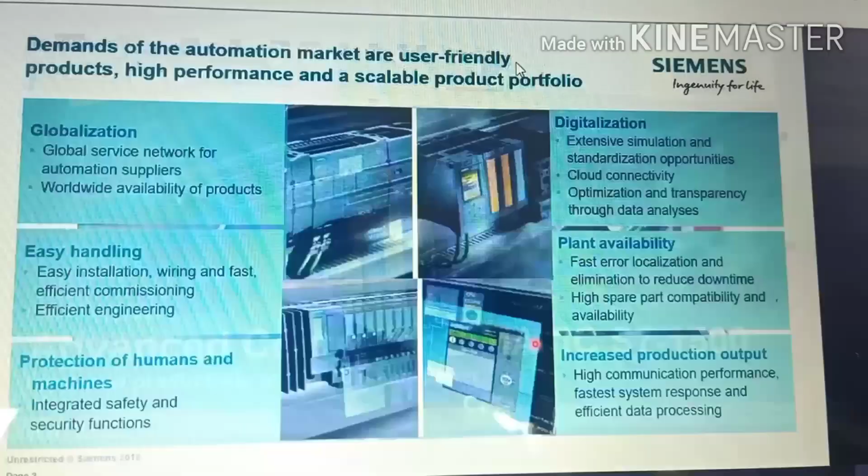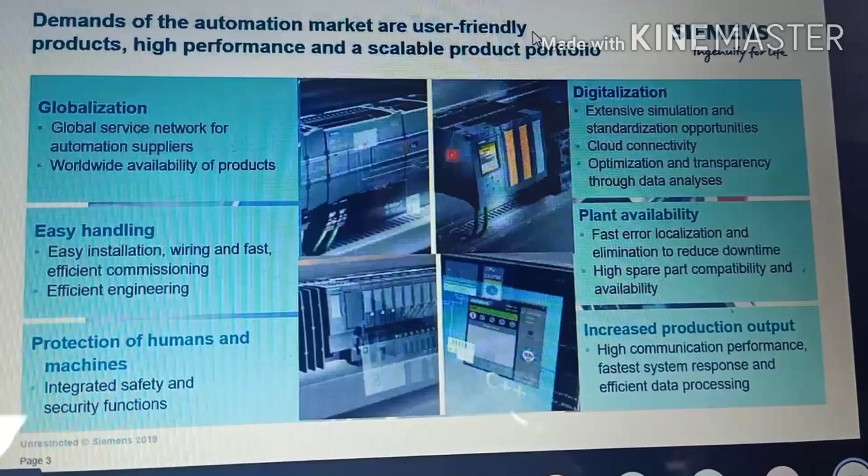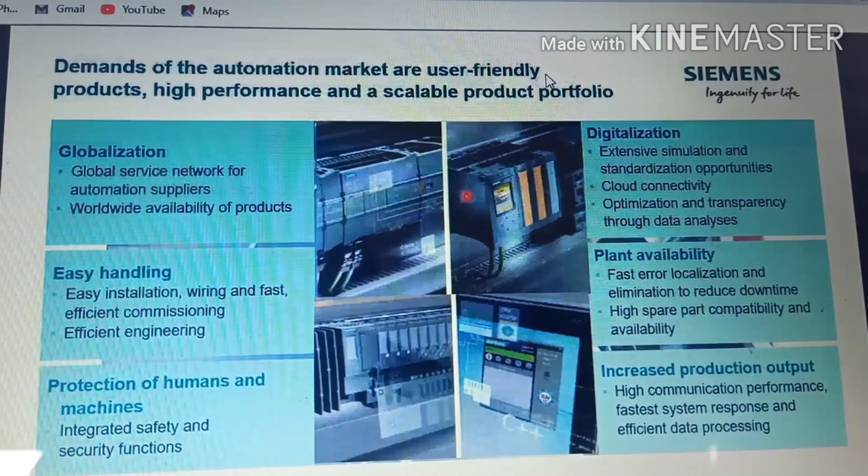As of today, the technology is ever changing. Every day, new requirements are coming for the OEMs. New challenges are there for end users to support their infrastructure and their solution providing and product offerings to the consumers. So why S7-1500?

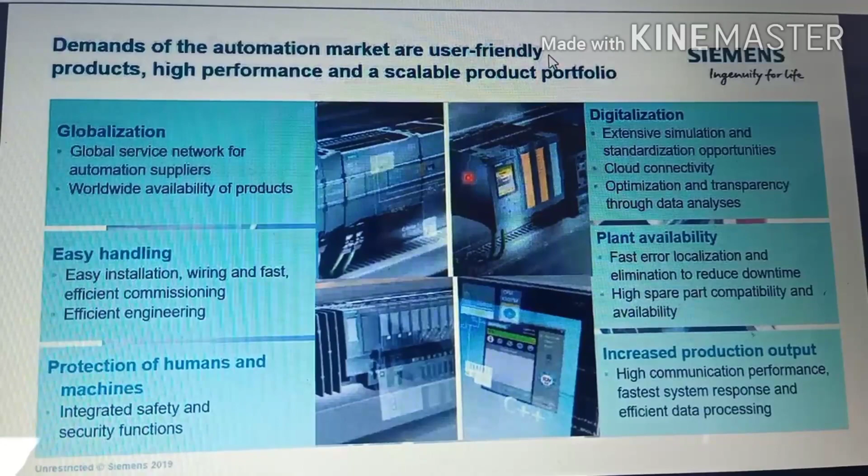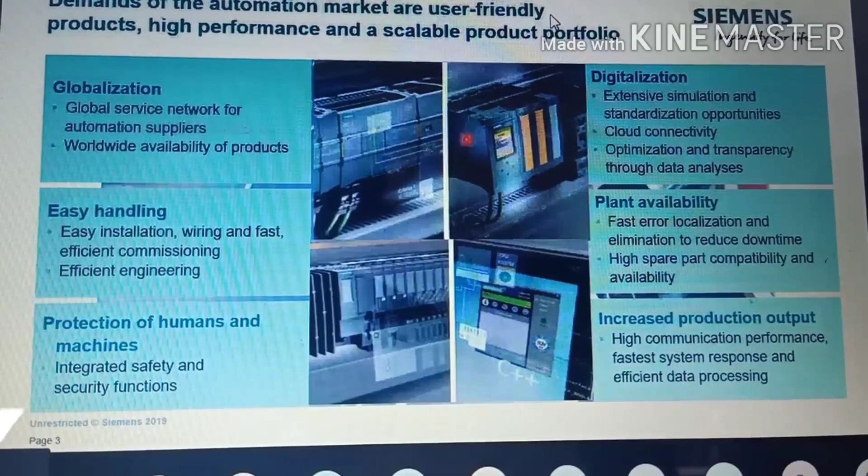Today the S7-1500 comes with a myriad range of facilities and the promise that it would help you increase production output. As of today, the S7-1500 can be used as your classic PLC plus a gateway to the digital world. Our Siemens S7-1500 comes with technology integrated as well as fail-safe solutions too.

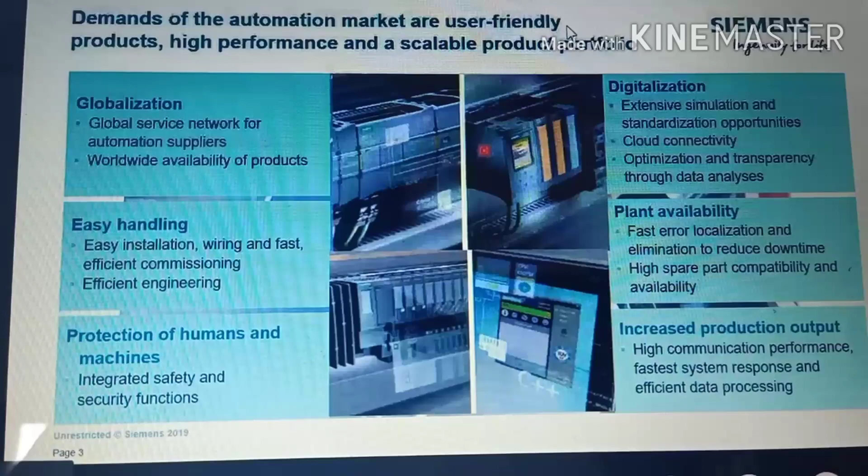Just to give you a brief, our S7 1500 solution, 1517 we call it, we have different ranges of the solution. A higher level of S7 1500 PLC can handle almost a whole automotive plant.

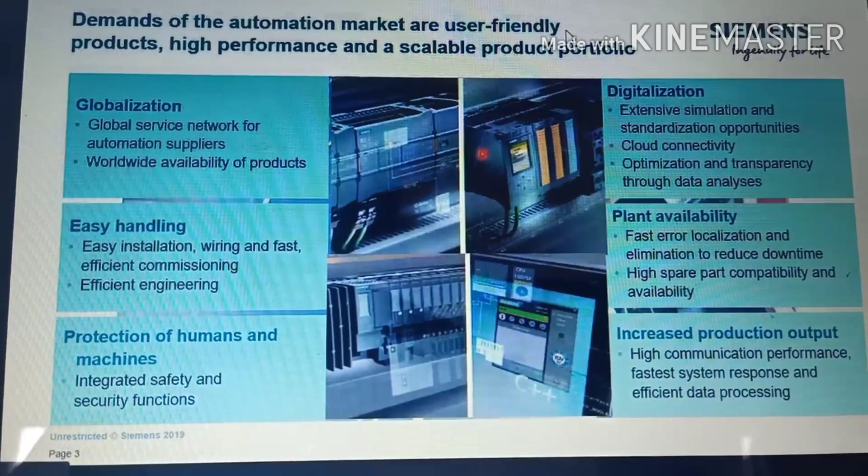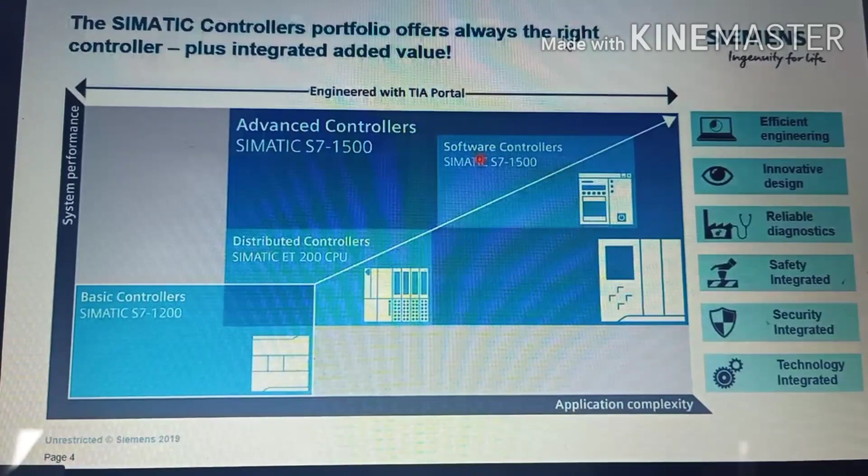To get into the details about it, next I will be showing you the product placement of S7 1500 across our PLC solutions of Siemens.

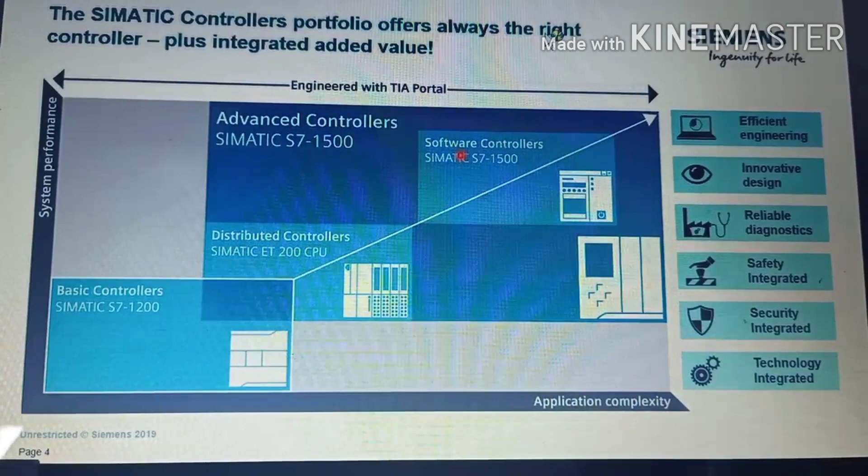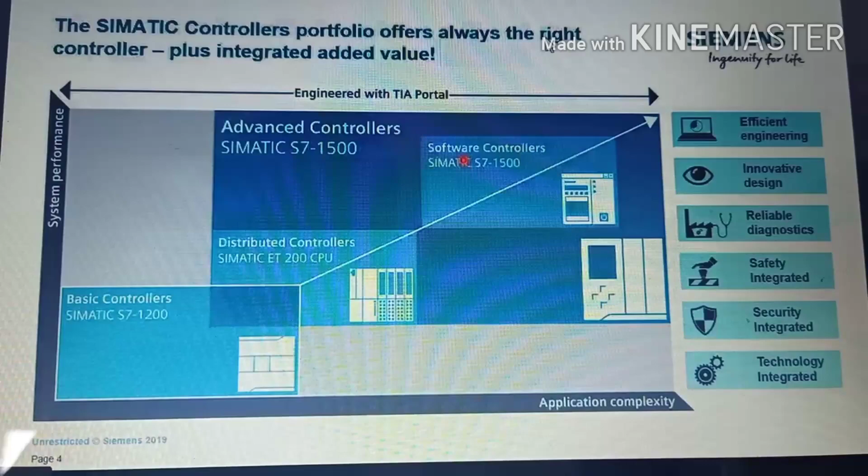On the y-axis you can see the system performance, on the x-axis you can see the application complexity. We have a range of S7 200 and 1200, which are basic SIMATIC controllers in which you can have nearly up to 250 IOs, having a basic solution in which you can program it and see it in your HMI and carry the non-important or very non-critical task.

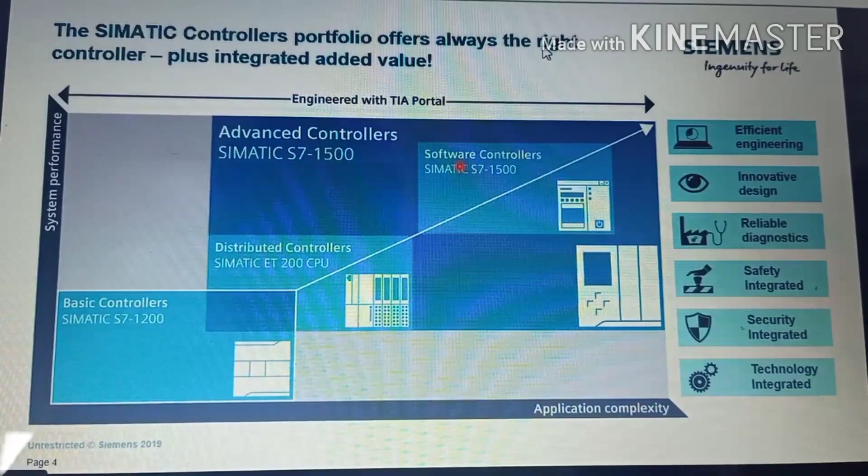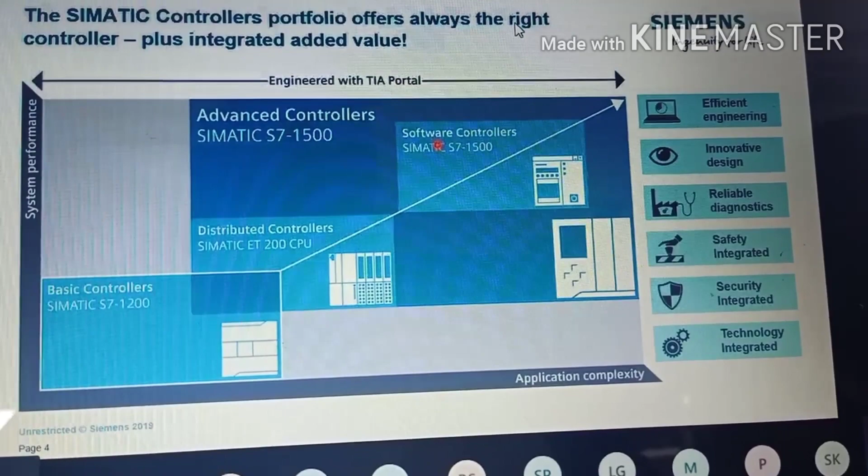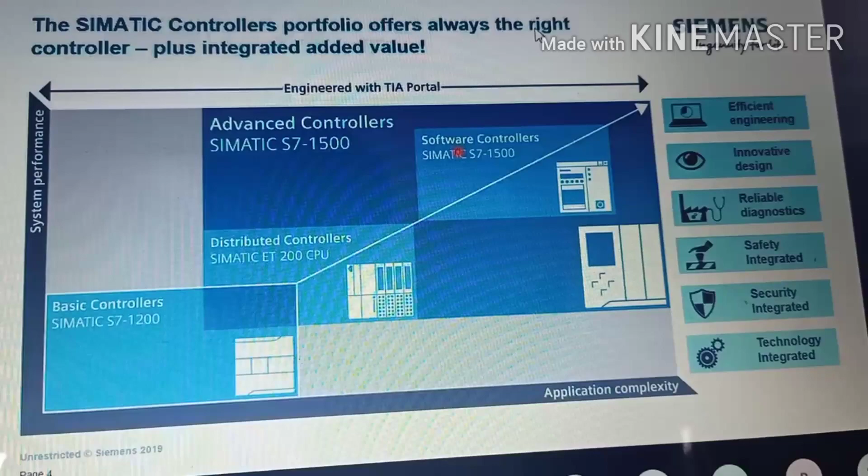After that, we have a distributed controller named ET200 SP or ET200 S solutions. There are 1000 IOs. ET200 controllers can help you get the field IOs directly back to the central system by having a Profinet or Profibus connection, in which your hardwired solution can not be very efficient. Like 300 or 200 meters of wiring would be a very difficult task compared to the Profinet connection of 200 meters with the distributed controllers. Then we have the software controllers of S7-1500.

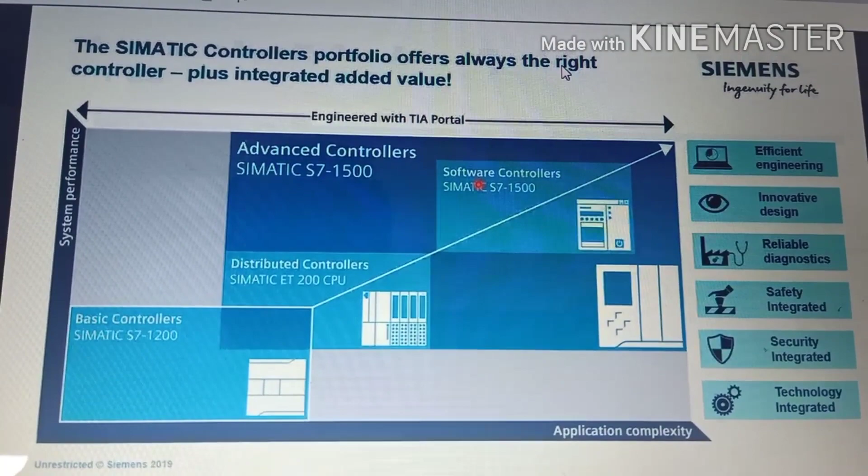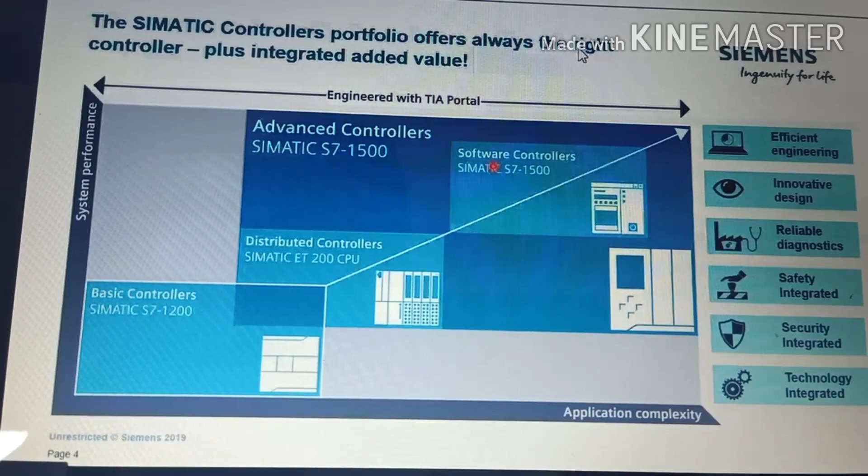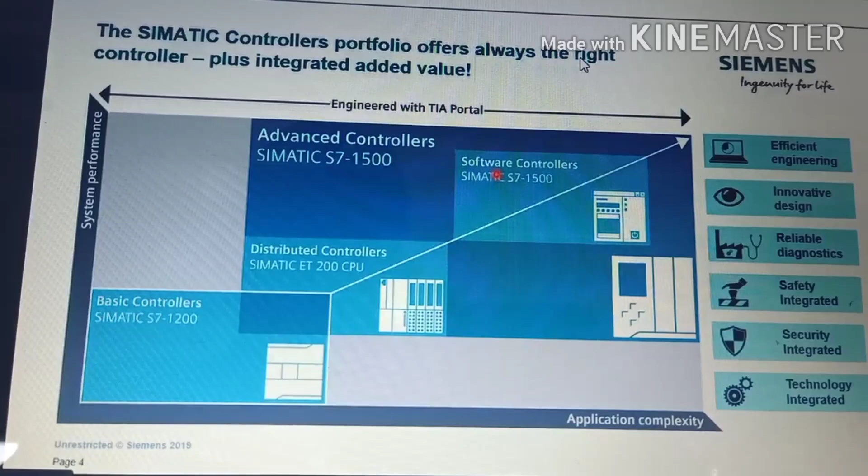The very speciality of S7-1500 is it comes with different features of reliable diagnostics, integrated security, and integrated technology. It comes with OPC UA, the Open Platform Communications Unified Architecture, in which you can connect the system of your plant with vertical as well as horizontal integration.

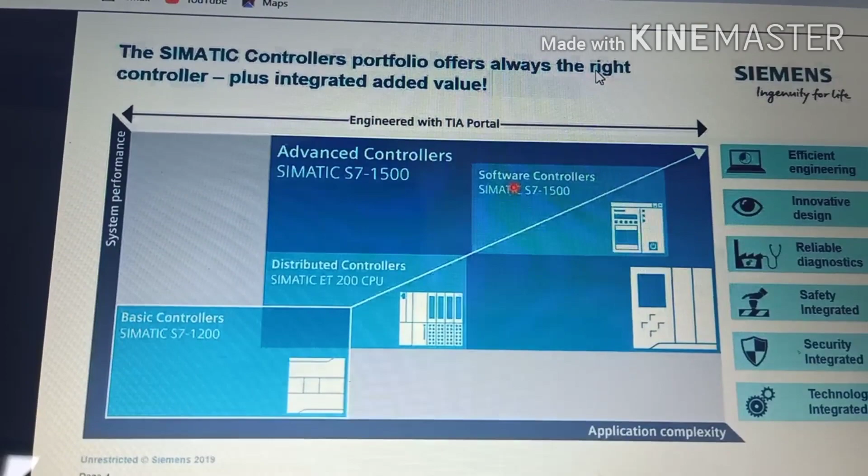And to sum everything up, the solution which you can see here can be engineered with our Totally Integrated Automation Portal, known as TIA Portal.

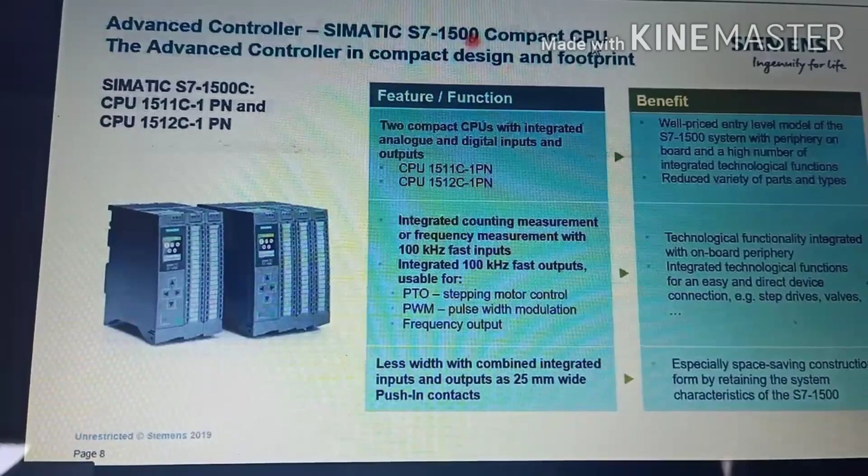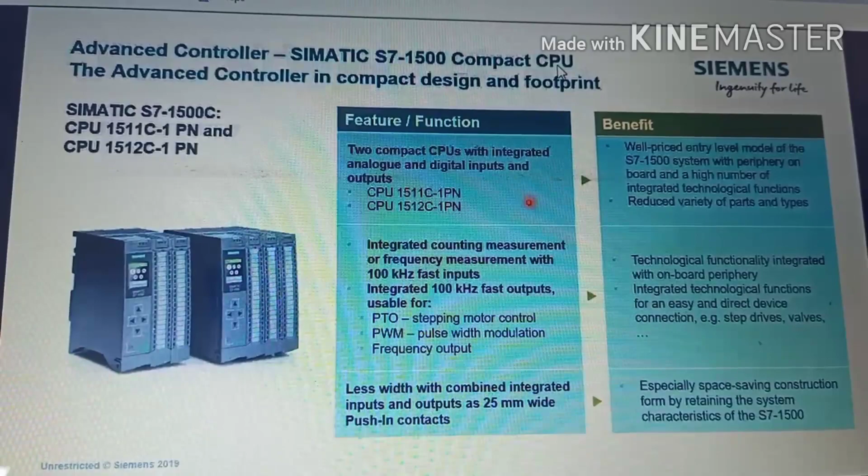Some of the features and functions of S7-1500: we have a solution of 2 compact CPUs in which you do not need additional IO cards if you have only 50 or 60 IO systems. Like in 1511C, which has one Profinet port, and 1512C with one Profinet port, you can have nearly 32 to 64 DIDOs or AIOs clubbed in.

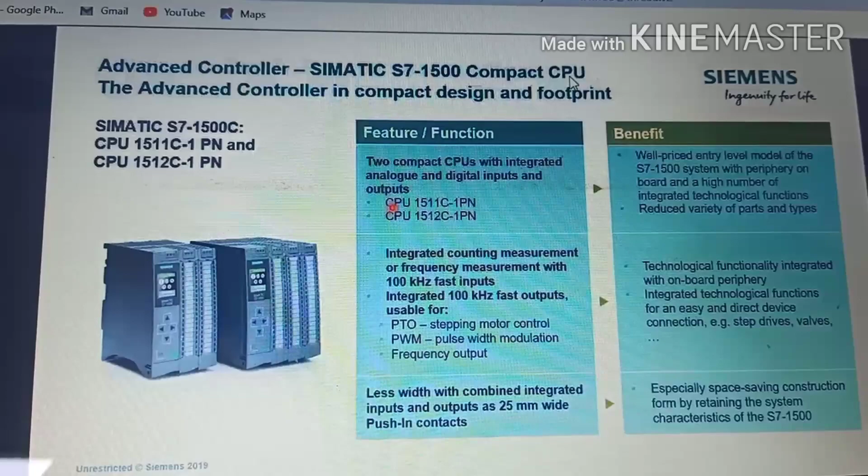Benefit: it is a well-priced entry system in which an OEM providing nearly 100 IOs, or nearly 50-60 IOs, and wants to be technology compliant, can use the S7 1500 solution.

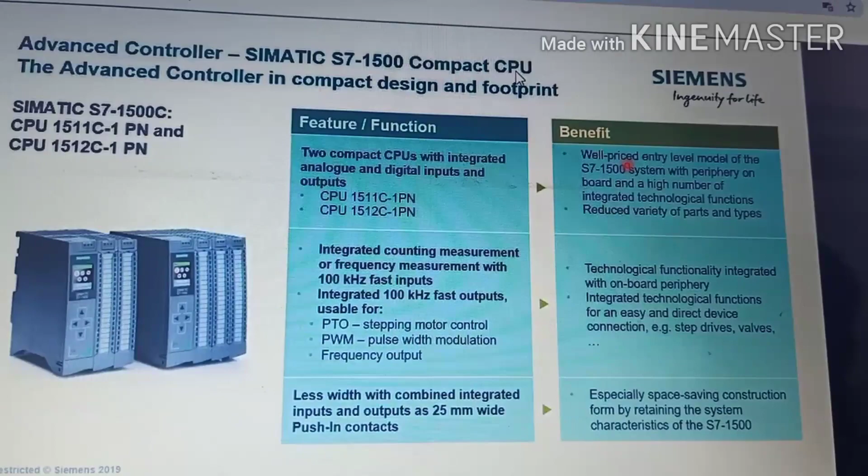Integrated counting measurement with a frequency of 100 kilohertz with fast inputs. There are different types of inputs, and the processing speeds of the inputs vary according to the DI or DO we use. We have the fast DI modules, in which the measurement counting would be near about 100 kilohertz frequency.

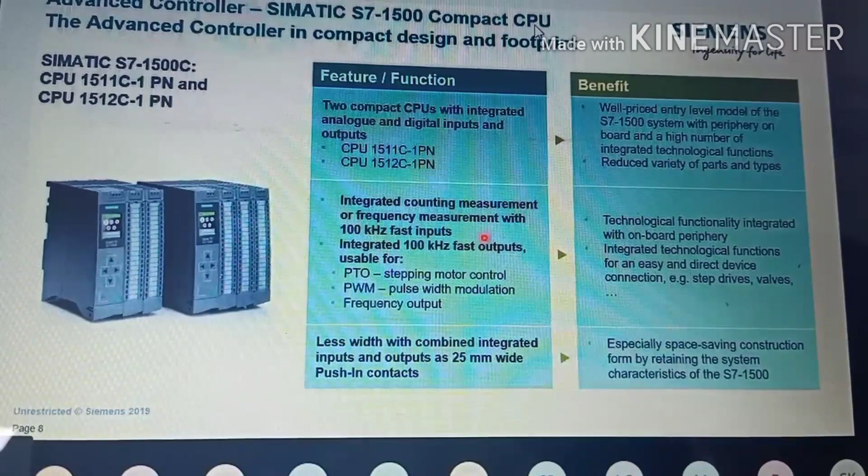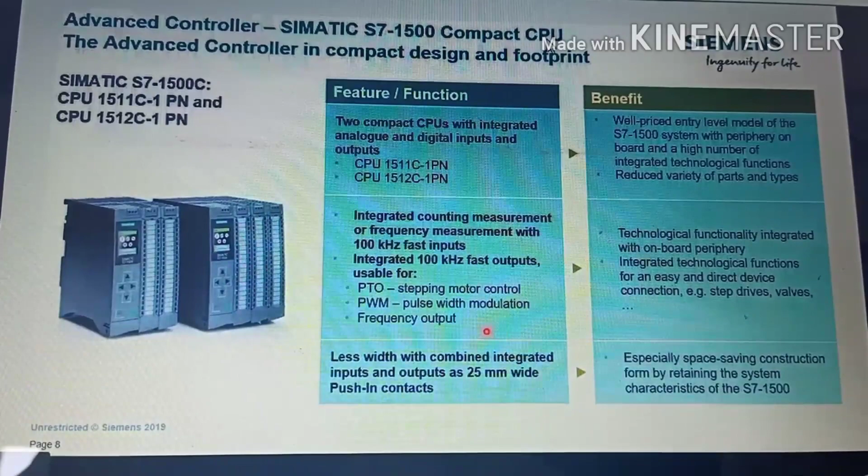Less width, with combined integrated inputs and outputs of 25 millimeter wide push-in contacts. Basically, it is a compact solution in which you won't be needing the whole panel horizontal space. Only a small space of nearly 25 mm wide would be helpful for push-in contacts. Just push it on the DIN rail, and the system is good to go.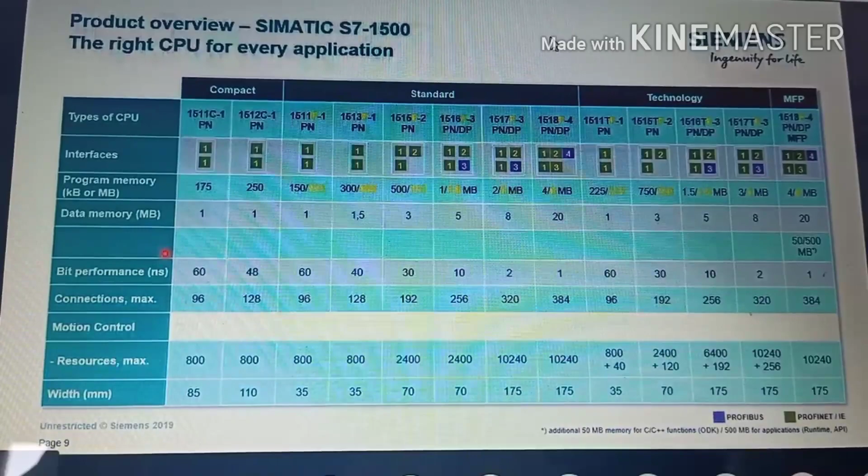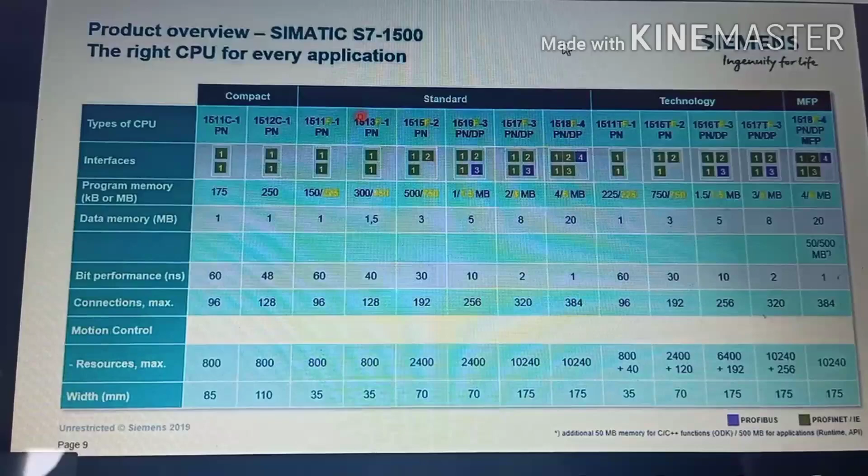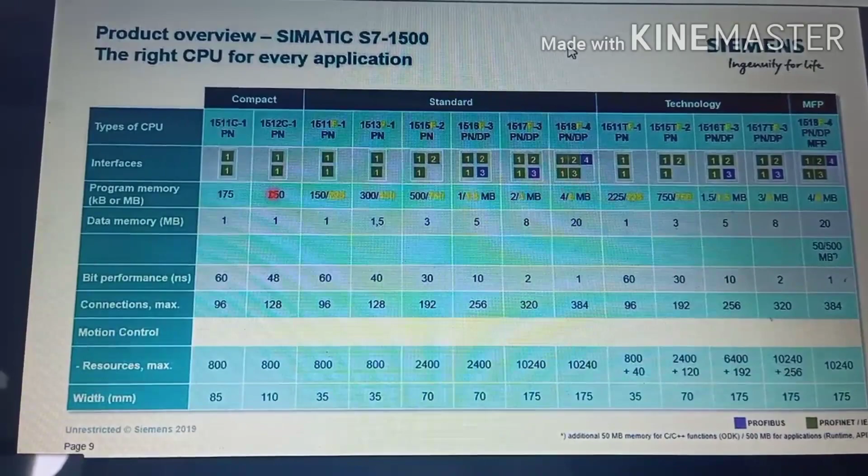For the product overview, as you can see on my screen, we have divided the S7 1500 solution or portfolio into different types of offerings. First is the compact offering, which I have told you, which has program memory of 175 and 250 KB, data memory of 1 MB, bit performance of nearly 60 nanoseconds and 48 nanoseconds. Just to give you a perspective, 1 nanosecond is near about 10 to the power minus 9 seconds.

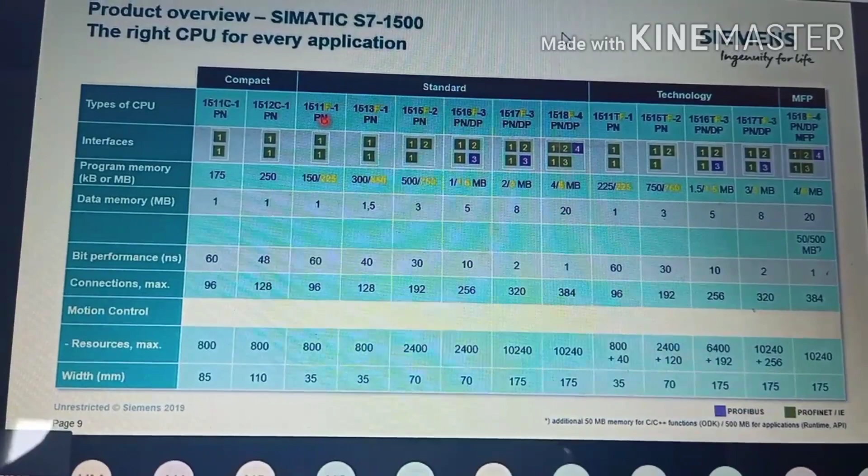The 1511F feature, the fail-safe feature, comes in when you need a solution in which there is safety integrated with SIL 2 or SIL 3.

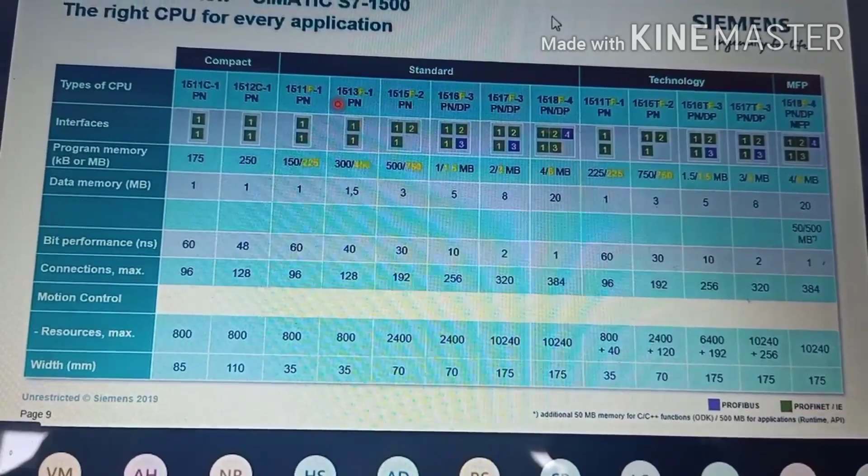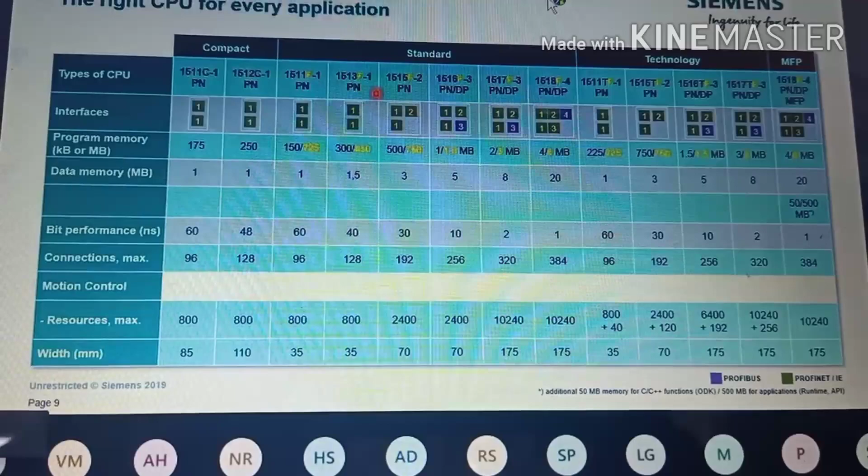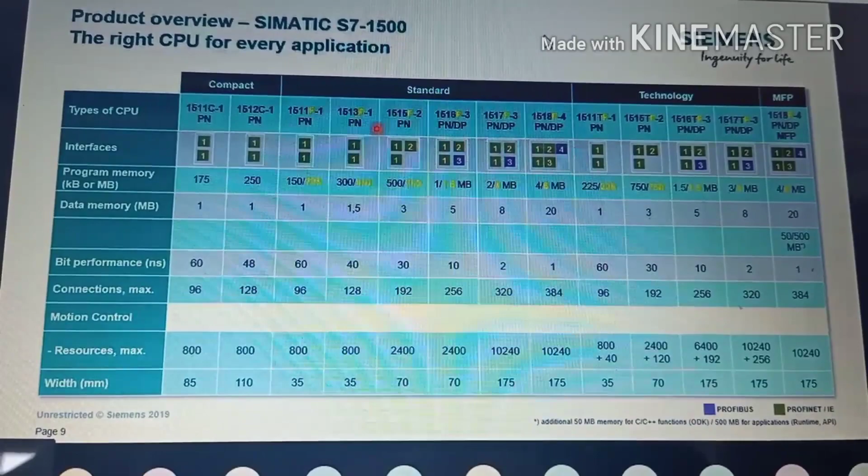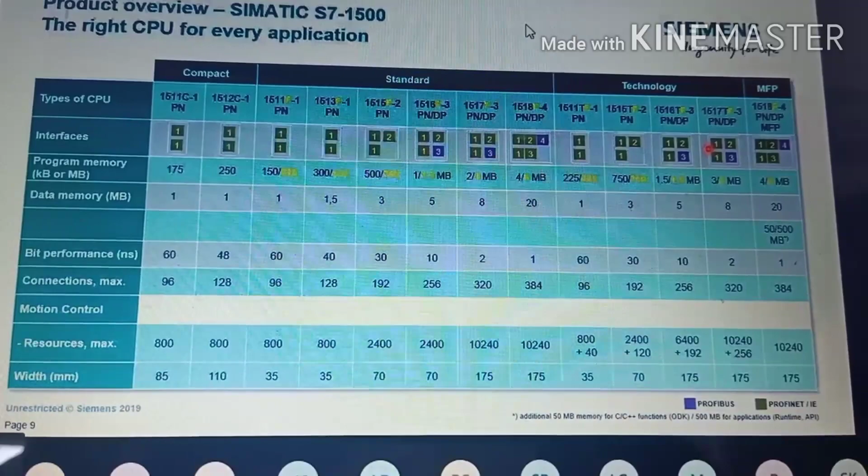Normal and fail-safe. In this, the very much quality of fail-safe PLC is that there is a mixture of IOs you can put in your system. The standard IOs and the fail-safe IOs can be integrated together in the same rack, and programming can also be done in the same. Then we have the technology CPUs, which the automotive industry needs, in which camming and interpolating solutions are provided. We have the 1518, in which the programming can also be done through ODK and C++.

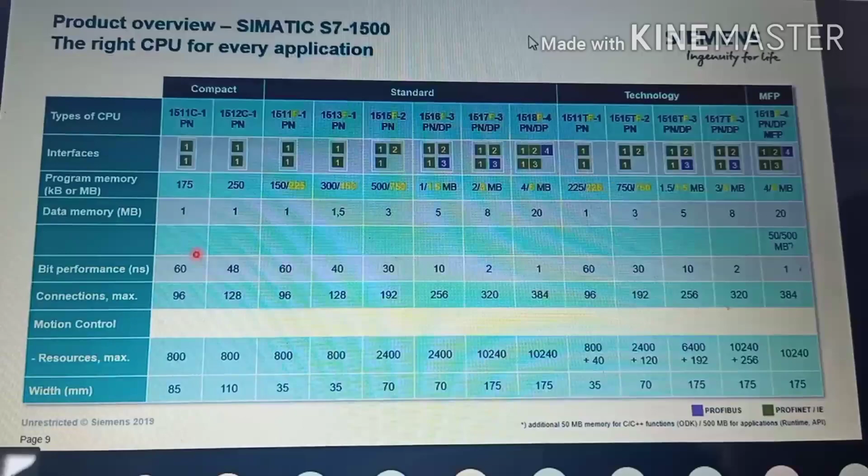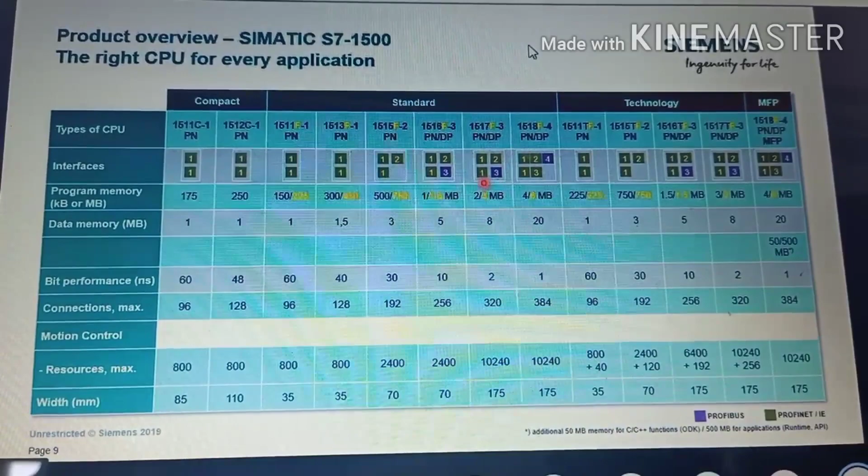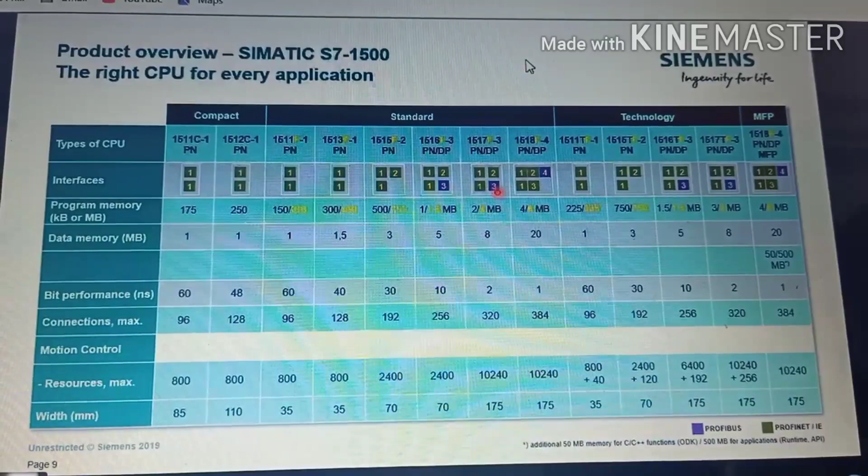So just to give you, from 60 nanoseconds of bit performance to 1 nanosecond of bit performance is the range of the PLC we have with S7-1500. As you can see, the 3PN/DP tells you that there are 2 PN and 1 DP port. This 1, 2 and 3 defines that the first would be having the same address, the second would be having the other address, and third is the Profibus DP, which would be having its own 126 nodes. So this was all about S7-1500.

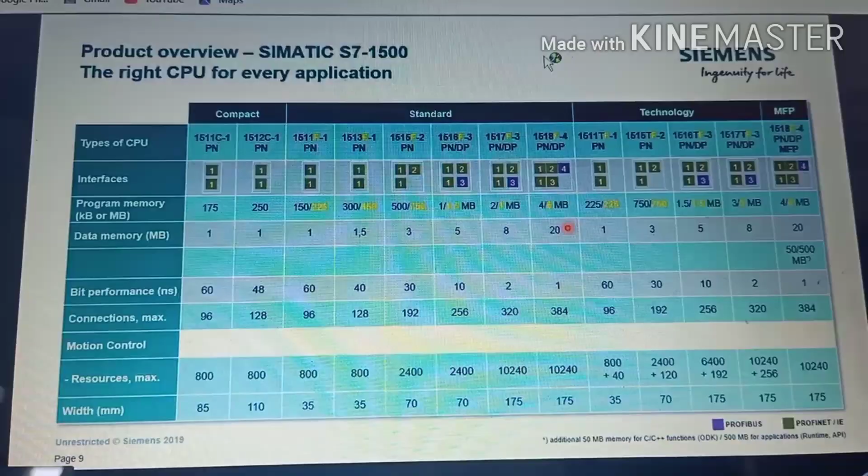The next comes the SIMATIC ET200SP. Many of you would be knowing about our S7-300 and ET200S solutions. Similarly, with S7-1500, we have the ET200SP solution, which is the field CPU or the field IO system. As I said earlier, if you have a central system and you need some field IOs to be taken back to the central system, you can always rely on the ET200SP system. Its key features are a simple installation and wiring and fast commissioning.

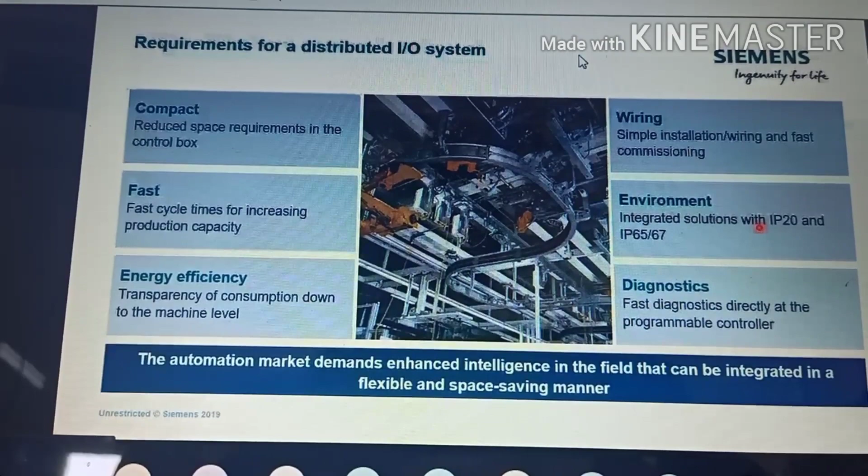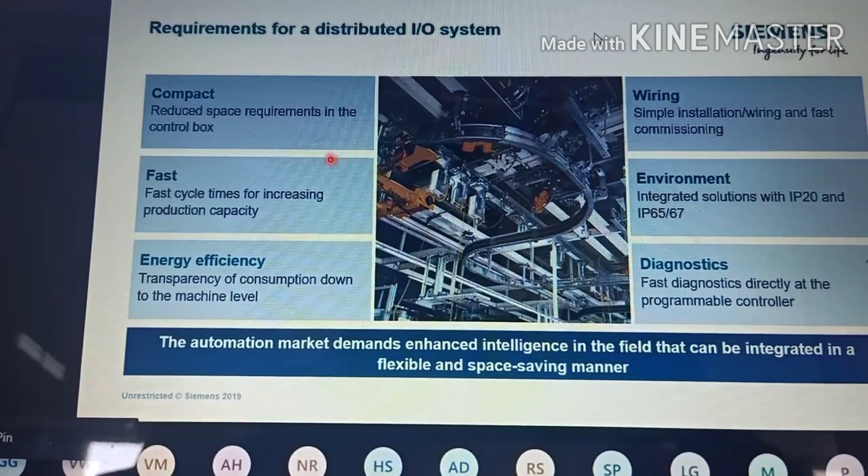Environmentally, we have solutions from IP20 to IP67. Suppose you have a plant in which you need the IP67 solution for the field IOs also; there are some situations in which the failure of IP can keep you from getting the solution properly. There is a fast cycle time. In this also we have fast F-DI and F-DO modules, similar to the S7-1500. It is compact and the space requirements are very less. To top it off, the CPU in this also comes with OPC UA connectivity.

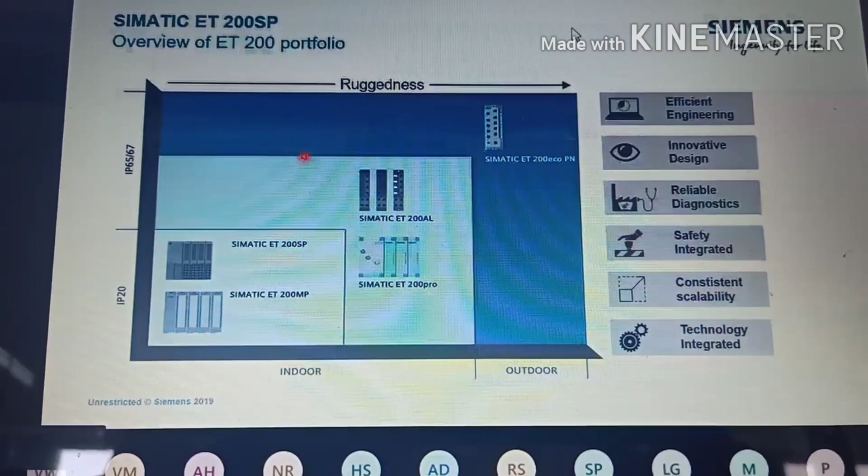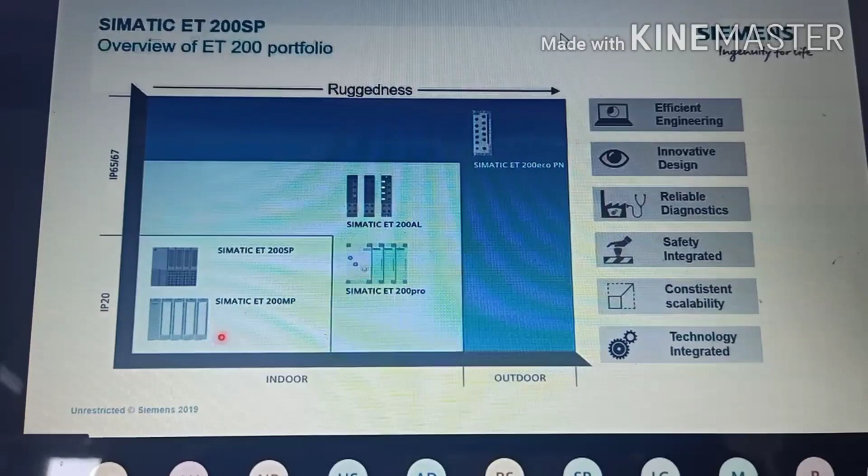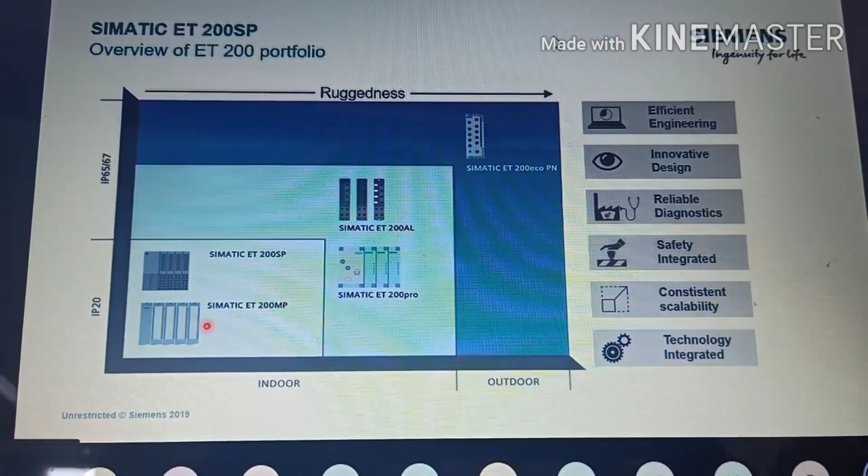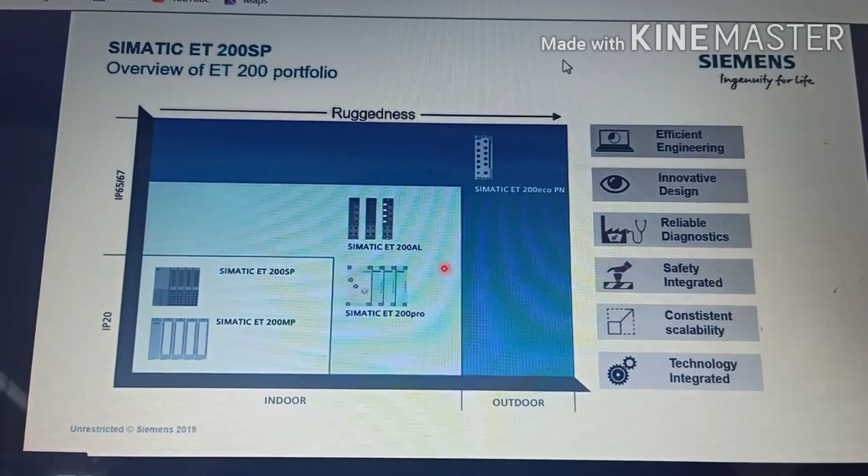The overview of the ET200 portfolio: as I have been saying about the SP system, it comes with IP20. Similarly, SIMATIC ET200MP solutions have the same width, so the IO system of the 1500 can be compared with the IO system of the SIMATIC ET200MP. Just the PLC would be different, but the IOs would be interchangeable between S7-1500 and ET200MP. Then again the ET200AL and ET200pro systems, which have IP65,

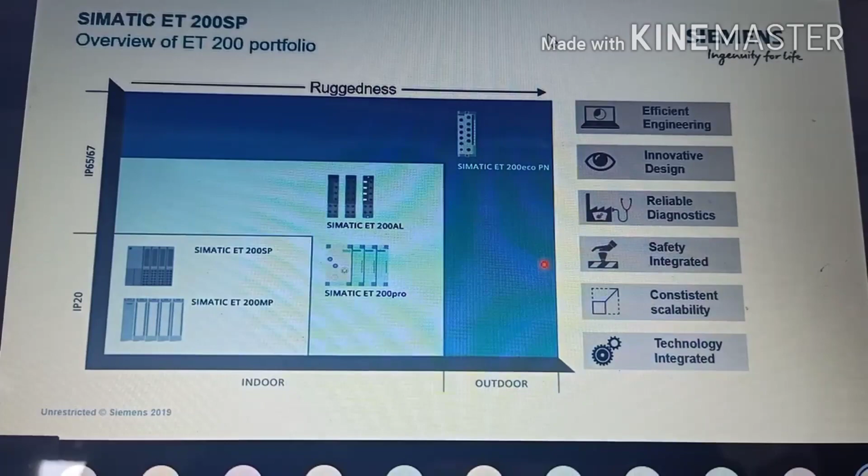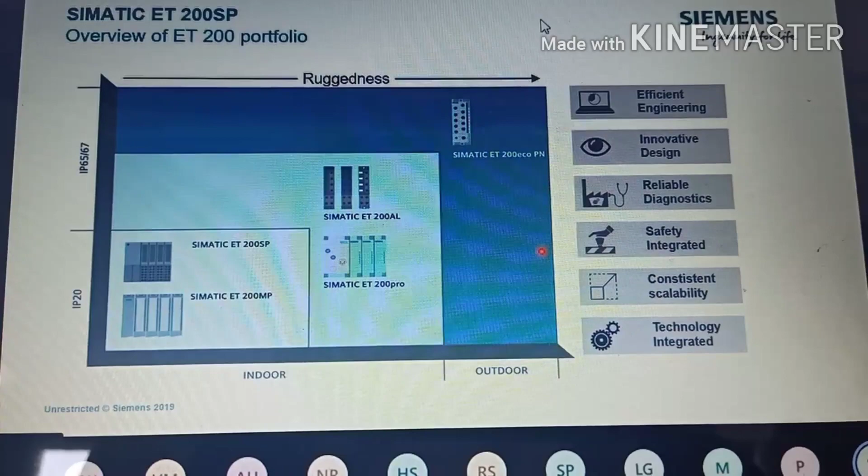and then the ET200eco system, which comes with Profinet IP67. Where it is mostly used: if you have a panel in which you need all the IO system upfront in front of your naked eye, you can use the ET200eco system. It is basically IP67, and all the programming of a PLC can be done. No need to have a specific enclosure for it. It can be mounted on any of the panels, even a small panel.

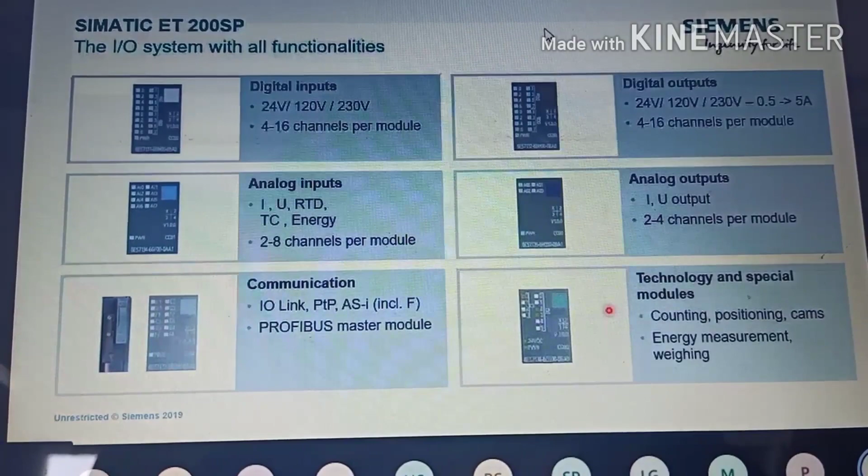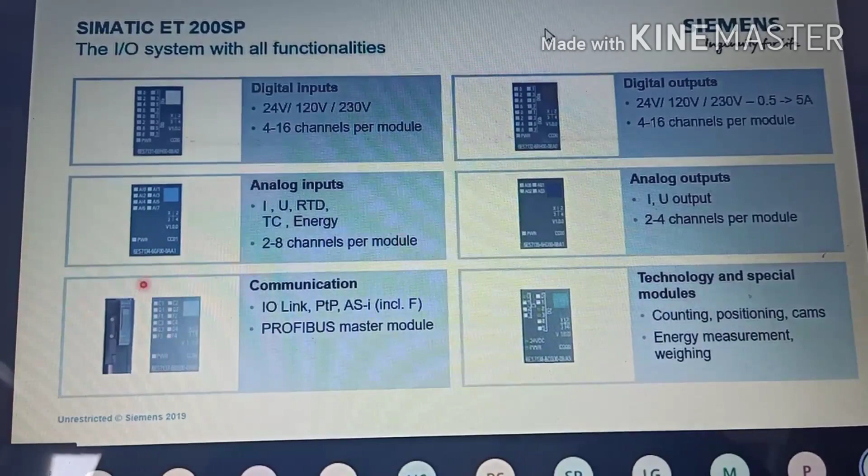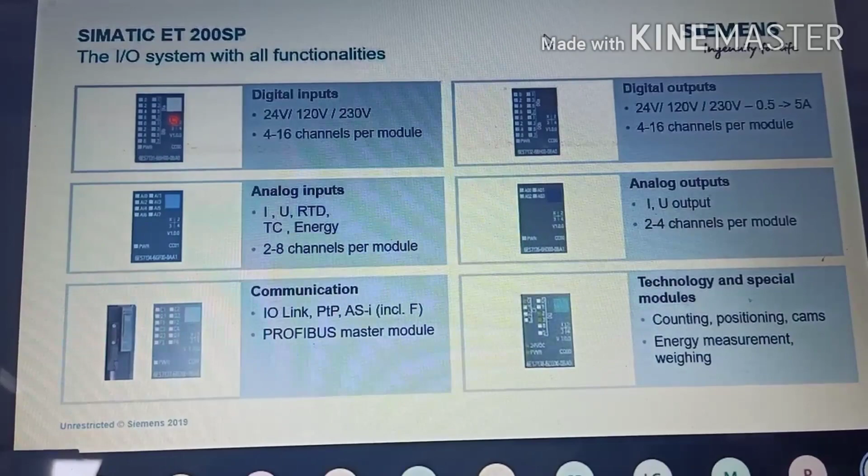One of the distinguishing factors of the ET200SP IO modules is that in the digital inputs we can have 24 volt, 120 volt and 230 volt IO systems with 4 to 16 channels. The one differentiating factor in all of the 6 modules you can see is that we have a color marking system. In the field, it is very difficult to know which card is the input or which card is the output. But in this, you can see that white color tells you it is a digital input.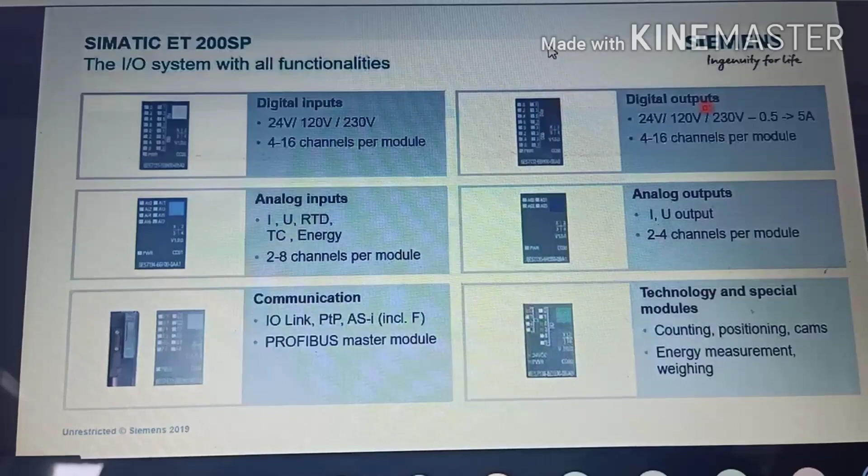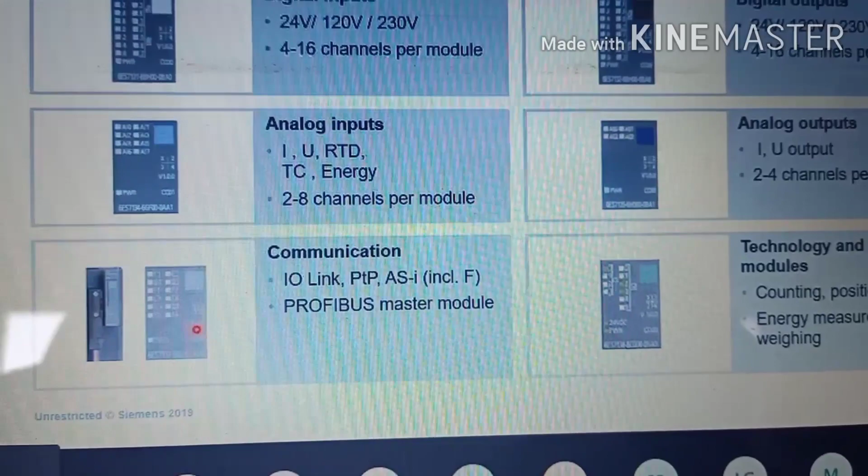The black color gives you the digital output, because many times blue collar people are handling such systems. There is not a specific automation or E&I engineer who will always be there to help you out or to see that it is not getting disturbed. So you can use this color code to tell them that if a black spot is there, it is digital output; light blue is analog input, and similarly for the communication protocols.

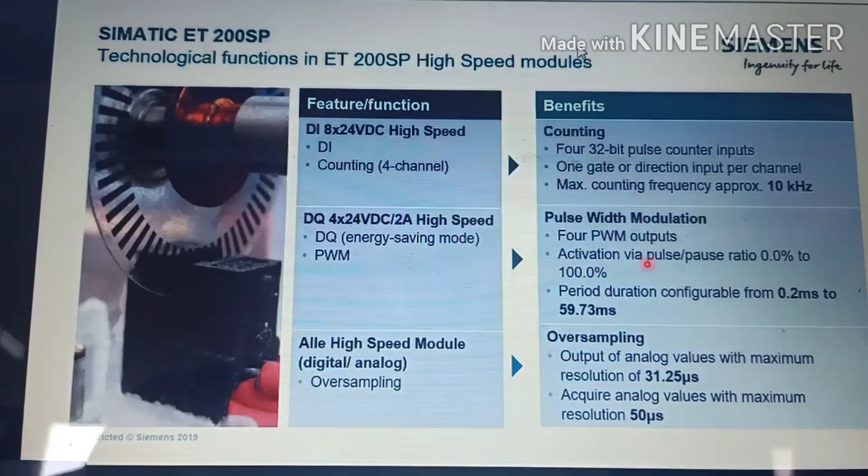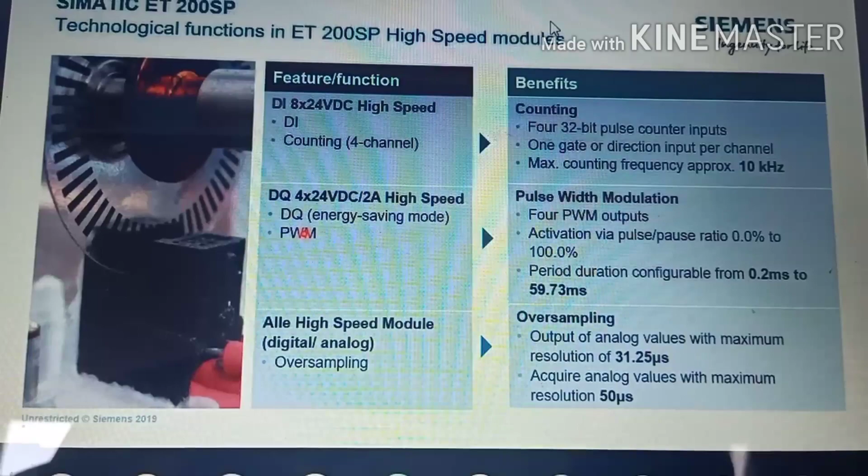We have a high feature 24 volt DC, 8 DI module for the ET200SP. High feature basically means you will have faster processing speed. Suppose you have a pick and place operation which needs higher precision; the fast DI modules come handy with it. High speed, energy saving pulse width modulation DQ outputs can also be used in this. Basically, these are the sections in which fast response is a major critical KPI for a machine builder or an end user.

I would now like to hand over to Mr. Ganesh for taking this line integration chapter for our customers. Mr. Ganesh, over to you. Yeah, thanks, Sumit. So I will be taking you through the line integration concept we are trying to implement in the food and beverage industry. Can we move to the next slide? Yeah, sure.